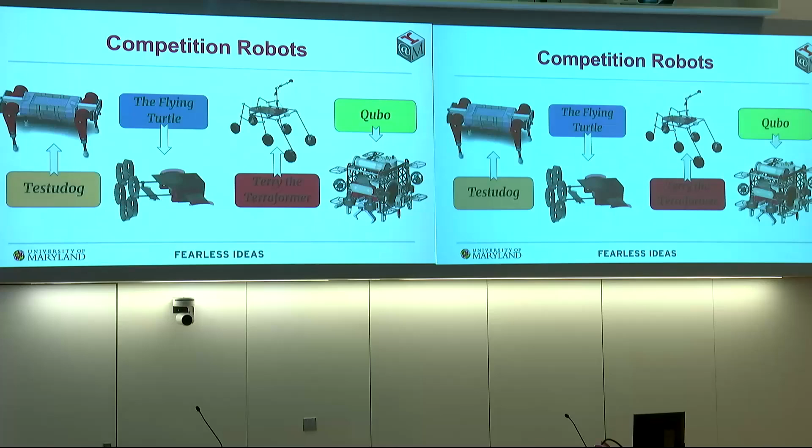So all of these robots come together to form one very large organization. Let's talk about one at a time first. This is Qubo, he's over on the table. Qubo is a submersible. This means that it's able to be underwater and it's neutrally buoyant, so we can then manipulate ourselves similar to how astronauts move around in space.

We have 8 thrusters that allow for pretty precise turning, roll, pitch, and yaw, as well as implementing fully autonomous operation, including an IMU, camera, Doppler velocity log, and a lot of other things. Here you can see a brief GIF of our pre-qualification in a neutral buoyancy lab. We have to go around that pole, through the gate, and back through the gate again. So you can see our autonomy finishing the pole loop and then going through that.

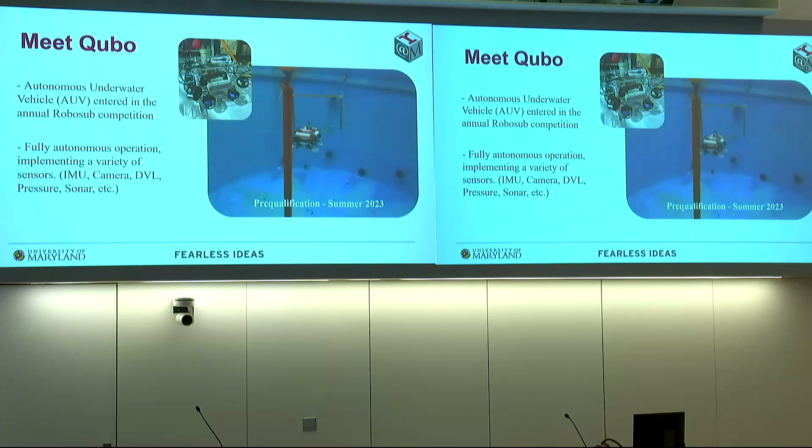And then this qualifies us for semifinals, and we were actually able to become finalists this year for the first time in probably over a decade. It was a huge milestone for us. We were able to do this through a lot of very hard work from our leadership, as well as technical abilities, and a lot of hours.

Here you can see an example of what we did during the competition. Let me play that again. What's going on is there are symbols on a buoy under the water, and we have to use machine learning, which we use YOLO v7 and RoboFlow to do so, to autonomously navigate to 2 certain symbols, which are randomized each time. So you can see us bouncing into that top right symbol and getting points there.

This competition is an international competition, so every year it'll be in San Diego, California. This year there's 54 teams from across the globe. Last year, University of Bangladesh and University of Singapore actually took home first and second place. So it's a great way to meet engineers from a diverse set of backgrounds and also learn from people across the globe.

There we go. Let's talk a little bit more about the technical aspects of Qubo. We have the pneumatic system, which is our biggest milestone reached. This has been a 2-year project. We decided, hey, our servos are leaking water into our hull, and it's going to cost us thousands of dollars if water gets on any of this stuff.

Servos are unreliable. We wanted to make our own system from scratch, have that learning experience. So we actually were able to create a custom enclosure to produce a pneumatic system that basically uses compressed air from a paintball tank to actuate pistons. And from here, we can use this on our end effectors.

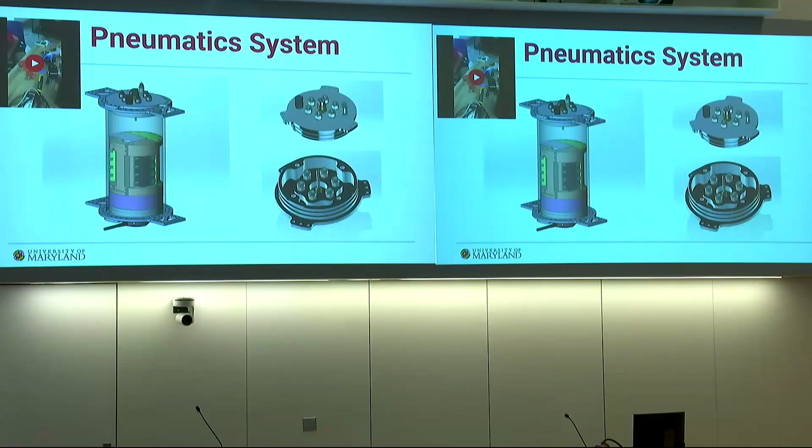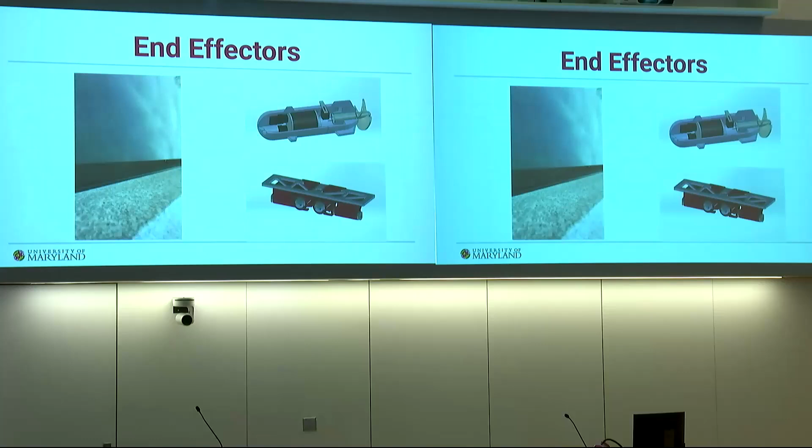Here's one example. We have our torpedo launcher. This is actually a self-powered torpedo, and all the piston does is actuate the limit switch up there, and then that will activate a supercapacitor, which spins a motor. It's actually a really cool idea that we've been working on. We also have the claw and the dropper. The claw is pretty simple, just a rack and pinion mechanism. And then we have the dropper, which uses the piston to almost reload the cartridge back and forth to drop an object into a bin.

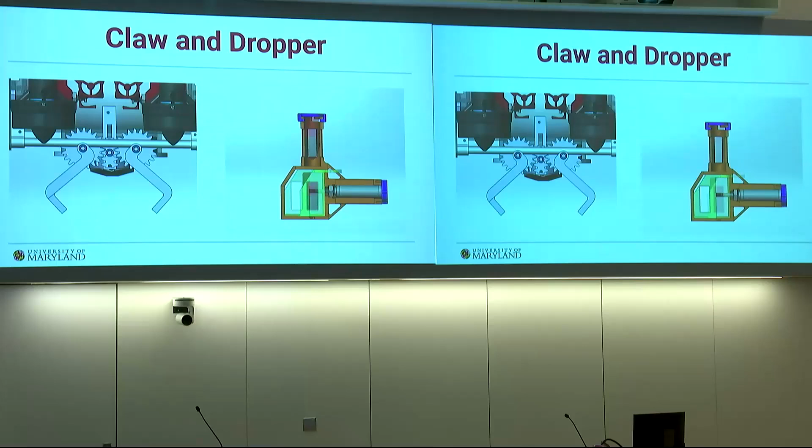And the goal of all of this, for context, is to score points, and whoever gets the most points wins the competition. Now let's get into more of the Testudog highlights.

Here's our most recent iteration. The main goal of this is to compete in IEEE's Robotics Challenge. It's a very new thing. Each year they host a quadruped robotics race. You can see the actual obstacle course in the plywood there. You have 3, 2, 1, go between two robot dogs, and they have to autonomously navigate this obstacle course.

Luckily for us, they create the entire simulation in Gazebo, so we're able to simulate it first and then navigate it later. Something to note is that there's only one dog that's built from scratch, the one that's fully red there. Everything else is kind of bought and developed on, and we take pride in building everything from scratch, so we hope to really show up for that.

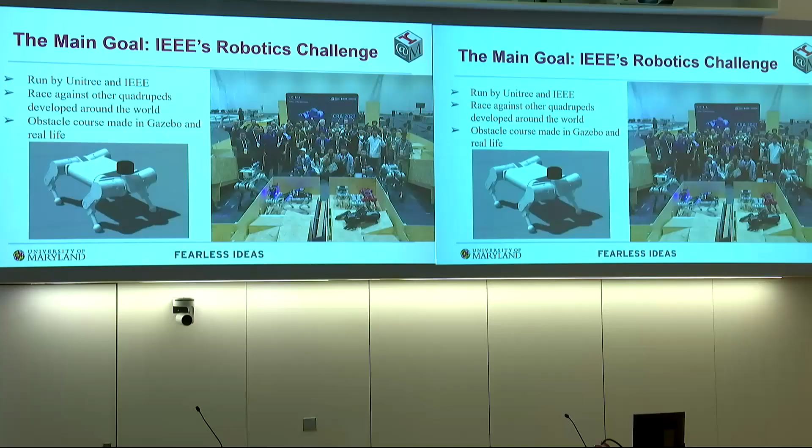Here's some progress that we've been making. It's been a team for around 2.5 years, and we recently were just able to get it standing, which has been a very big victory. As you heard from the other teams, Maryland Day is a big deal, so we were able to reach this milestone just in time, probably the day before, as most engineering projects go.

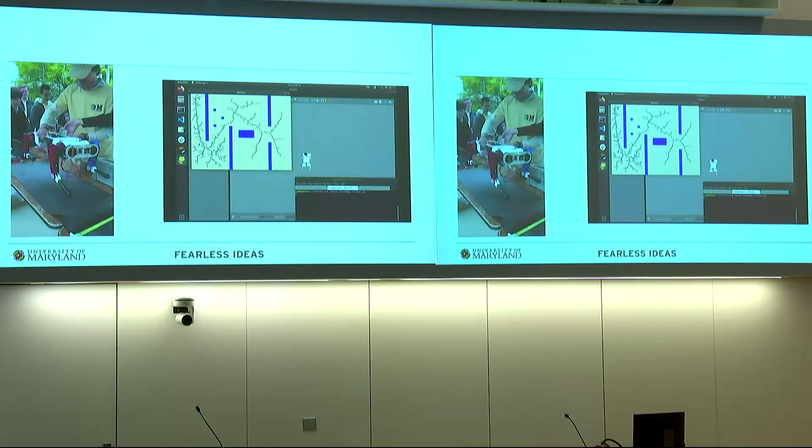Something to note is that as we get these legs to the position of standing, it wants to hold that position. These are quasi-direct drive motors that actually have torque sensing. So you can see Justin there pushing on Test2Dog. It's able to recognize the force being pressed against it and respond accordingly. And on the right, you can see a pretty typical obstacle avoidance for our basic simulation.

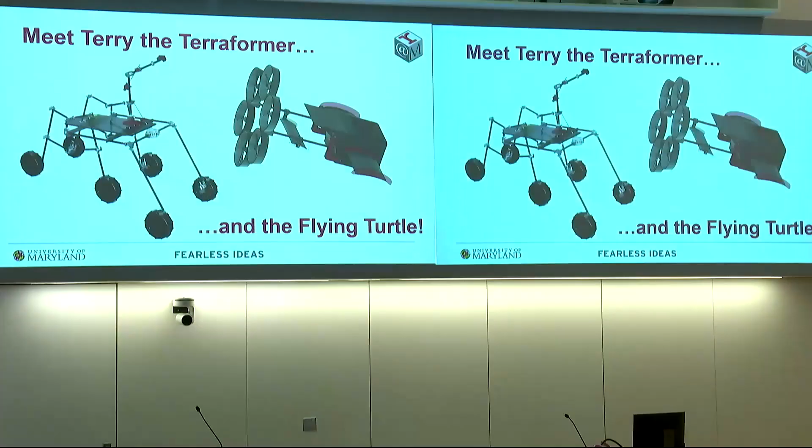All right, and we got one more team. I know I'm throwing a lot at you. We have Terry the Terraformer and a Flying Turtle. We have a lot of R&D that's been going on with this group. The main goal is to produce a Mars rover with the idea of simulating being in space, even though obviously we can't do so. And they were trying to come up with a lot of really interesting ideas to stand out during the competition.

One of those is an omni-gear arm. It's a novel sphere gear. The goal is to simplify the inverse kinematics by having more of a wrist-like actuation. So it will have these gears that can actually grip onto it axially as well as in the direction of travel. That way you can produce more complicated motions on one joint. And then they ended up using a main linear driven arm to do most of its science.

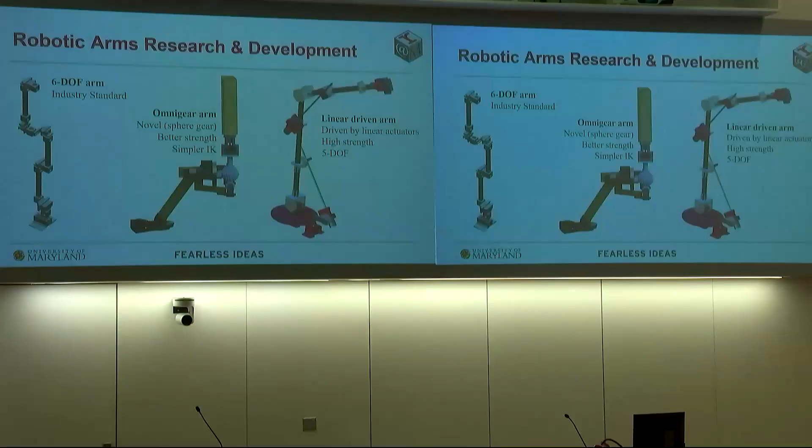Here's some more R&D, briefly. We have the bogie suspension, which is very typical for Mars rovers to avoid obstacles. And then they've been going on different wheel designs, including tri-tracks, which molds to the terrain. That was the main goal. You can see the FEA analysis of another wheel type deforming to the terrain.

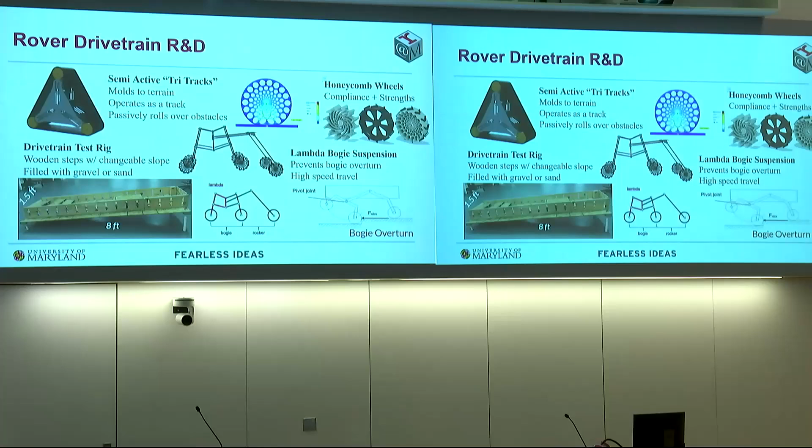And then we actually have a terrain tester that we made with it—it's basically wooden steps. We were able to modify the heights and the incline from there, to see the effectiveness of this.

And then here's our drone. It hasn't been working yet, but we're hoping to get it working soon. It takes off as a hexacopter, so you can imagine that photo on the top left being vertical. It can take off basically like a rocket ship, and then it can turn horizontally and cruise as a fixed wing. And then for this block diagram, the goal is to have a very modular system that a robot arm can then remove the battery of and quickly swap out batteries. That way you can do more consistent and reliable testing on Mars.

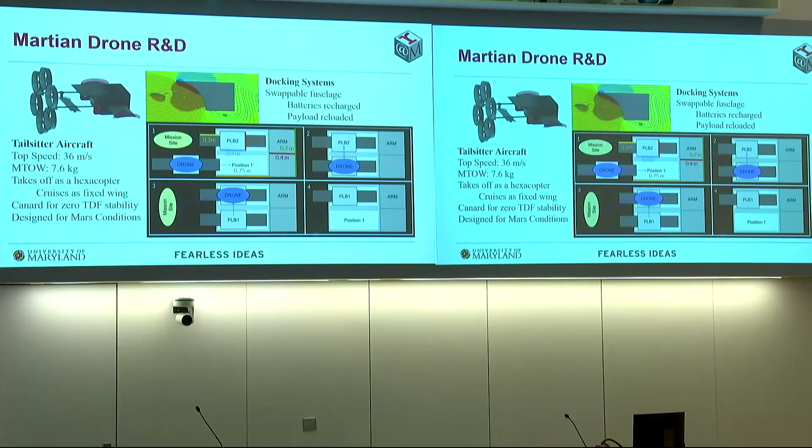So just really quickly, here at Robotics at Maryland, something that's very important to us is that we are privileged to be supported by organizations like the MRC, and I think it's also important to propagate that idea that robotics—you're here to learn, and we want as many people to learn as possible. That's why we have all these different projects, because we're really trying to be open and really spread the love of robotics for everyone who is willing to just take a couple weekends off in order to work on these projects.

Here at Robotics at Maryland, we like to say we will give you the experience, the tools you need, in order to really feel like you can make anything and build anything. And in return, we only ask that you try to learn and build for each other and your community.

So we also try to do as much outreach as possible. We talk to younger teams, we talk to First Robotics and a lot of others. We also like to show up for Maryland Day, of course, and try to go around and show what we're working with. We also have special workshops for our newer members so that they can really get out of the classroom and start getting their hands on some manufacturing methods.